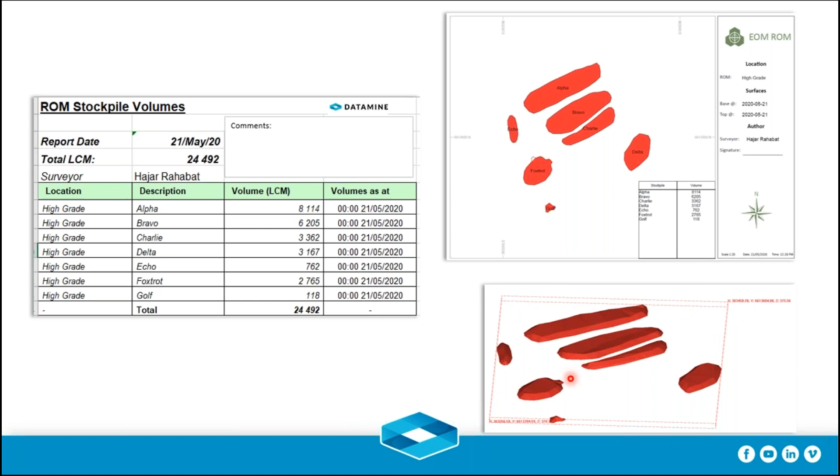The other report that we're going to do will be our blast volume calculation. You'll be able to see the PDF plot, the solid that will be generated. We'll deliberately create some complication so you can see how the blast volume calculator manages it. And then we'll also take a look at how this report goes.

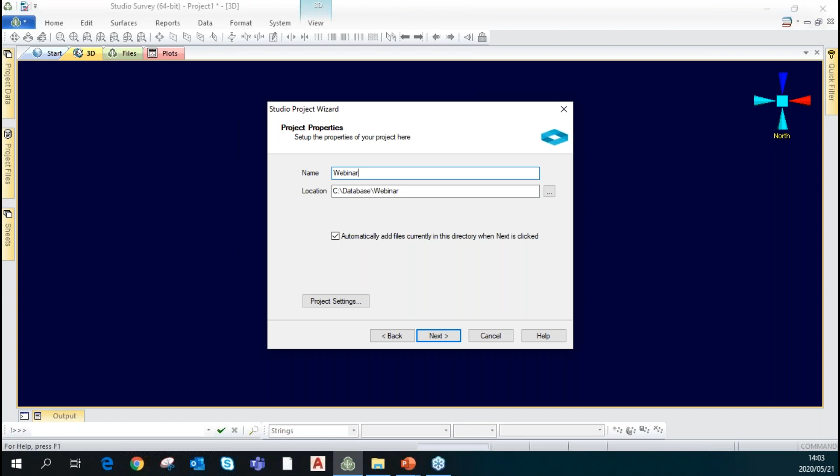So in the first webinar, we took care of how to set up a project. I'll just very quickly do that again. So we go new project, and in there, give it a name. We'll call this webinar 3. I have another webinar 3, but, oops, webinar 3. Next, finish. And we've successfully created a project called webinar 3.

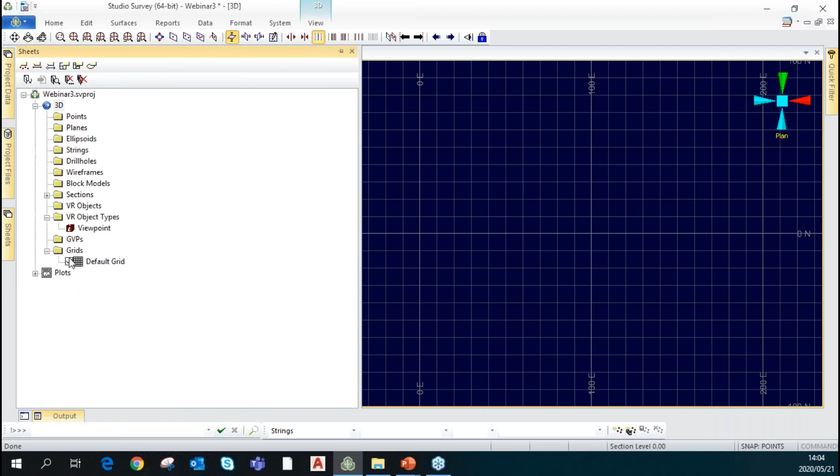So on the side, we've got the sheets, the project files, and the project data bar that shows all the files and the layers that you can switch on and switch off. For example, I can switch off the grid, and that's what you see when you switch off the grid. Okay, we can pin that or leave it unpinned. It will pop up whenever we need it.

So to make things convenient, I started off by preparing a folder that contains the various data sets that we need in the creation of our project this afternoon. So I'm going to load the survey strings for a stockpile first. In this case, I'm just going to drag and drop. Let's go to our 3D window.

As you can see, this is a messy survey. So we're going to clean it up using the string tools that are available to us, and then close these strings. And then after we close them, we're going to set them up in such a way that you'll be able to run your report.

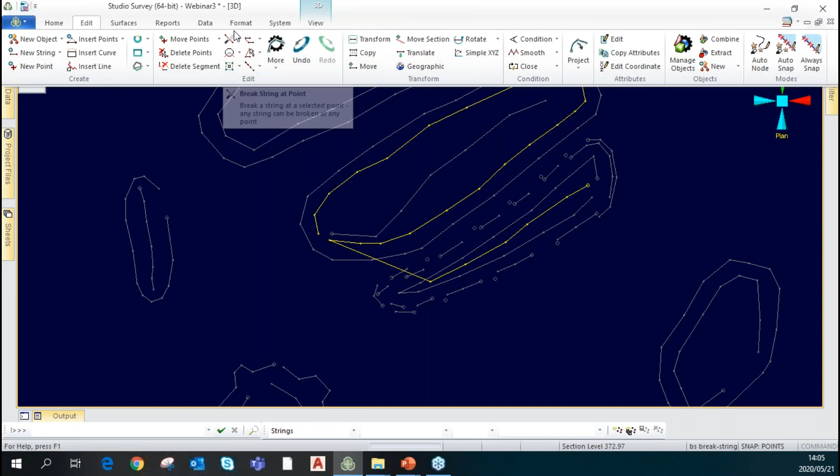So first things first, let's zoom in, let's break that specific string over there, break string. You type BS or you go to the edit tab and click the break button. So you have several different versions of how to break that. So we'll just break it. You click there and you click there. So we've broken that, we're deleting that.

So you can see as the surveyor was picking up this data set, he either moved from this dump here and then crossed over and surveyed that dump. And when he did that, he kept the code the same. So when Studio Survey imported the strings, it took that as the same data set and did not disconnect it.

The next thing we're going to do is close the strings that we need to close. So to do that, we know there's a couple of strings that shouldn't be closed, like the ones at the tops of these stockpiles. So we can hold down the control key and select the ones that we need to close, like that one, that one, that one. Okay, this is just for both of them.

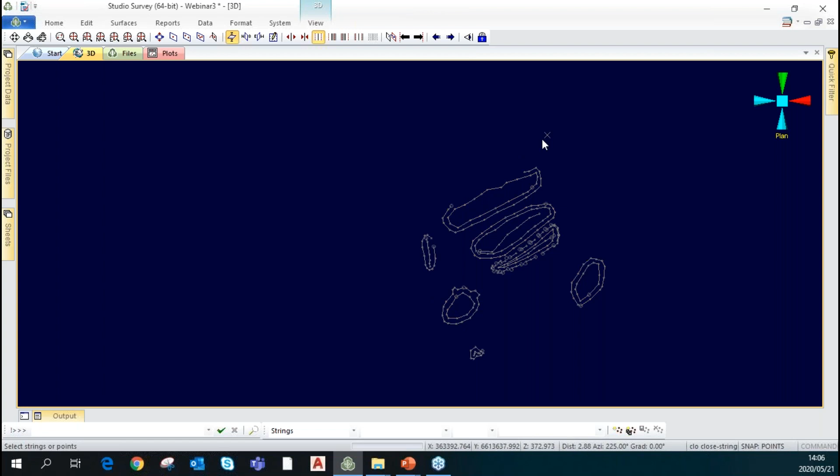And that one, and type CLO. Or you could go over to your editing tab and click close strings. I prefer to type the commands, but a lot of people would rather do it differently. So this one we can close, but you can see that this is unrealistic. This was a really shoddy survey, so we can just insert a few points based on experience.

Just move it out a bit so that we know that the boundary we're getting is where it's supposed to be.

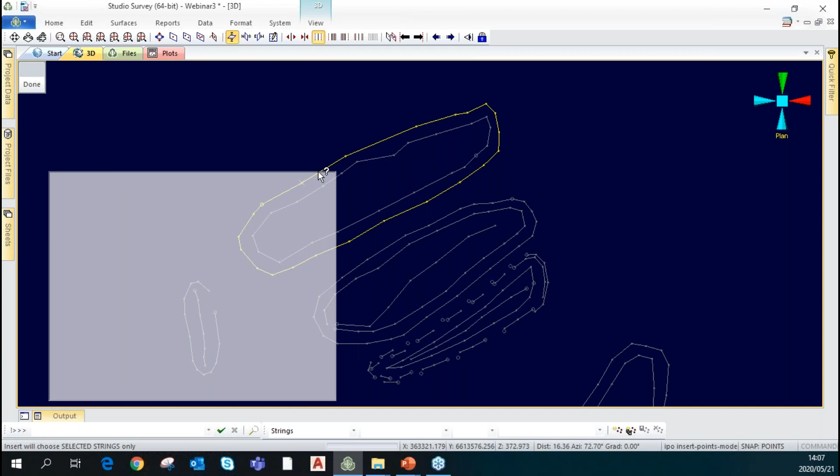Before you say anything, no, we are not supposed to do that. You're supposed to survey everything properly. Go pick up every single point around your stockpile, make sure that you've got yourself a decent data set and you're good to go. So that needs to be closed as well.

So for this one, what we're going to do is make use of the string command, which we go to edit, click new string, and we can activate the auto node, or we can click using the left mouse click, the right mouse button to connect the points that have been surveyed.

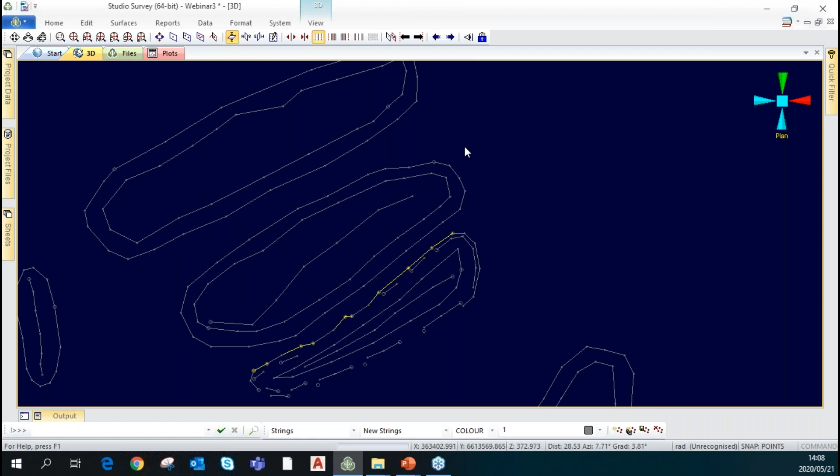So here I'm using my right mouse button to connect these two, simply because there's this data set nearby, or I can toggle with the rapid digitizer by either typing RAP and switch that on so that it digitizes, or I can simply switch on my auto node. So in this case, I'm going to use the auto node and new string and click to whatever is closest.

Now, seeing as that's not what we want, we can undo this properly. New string, snap to that point, snap to that point. So this is potentially something that you would be doing if you were cleaning up a survey done by someone that wasn't paying attention to how they downloaded the data set or did something incorrectly.

So RAP switches on my rapid digitizer, and when I click over there, same string, okay, let's go. Let's just finish that up. Close that string.

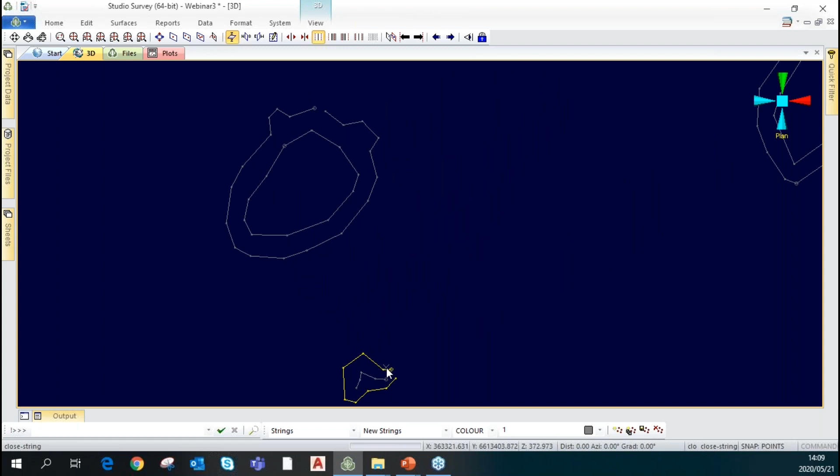So we now have ourselves a series of closed strings that define the bases of our stockpiles. I thought we closed these. Now this data set is exactly the same as the tops.

And then the other thing that you would have prior to starting off with this stockpile survey is you'd have yourself a topography on which these dumps have been created. So in this case, as you can see from the nature of the work that's been done, that wasn't created. So we're going to have to get creative, and we'll use all of these bases to build a topography.

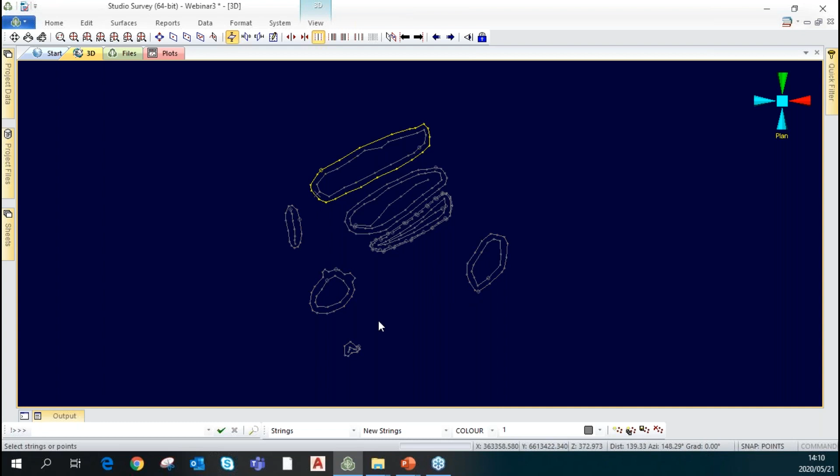So what we're going to do now is select the toes of these stockpiles, toes, toes, toes, toes. Right click and save the selected strings.

So the selected strings we have saved, we'll just chuck them into this. We'll have two uses for this file. So for now, we'll just save the base file.

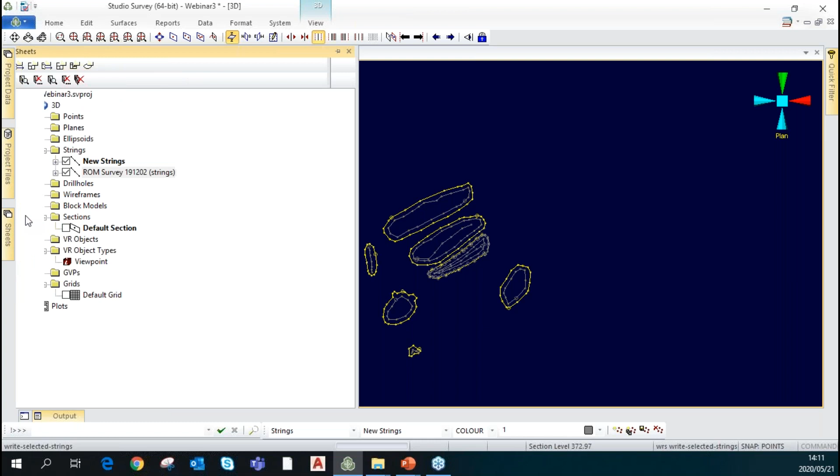And if we go to our Sheets tab, you can switch off the strings that we've got already, and then load the one that we've just created. So that's our bases file, and we're going to load that. We say OK. And what you see here is the bases that we have available.

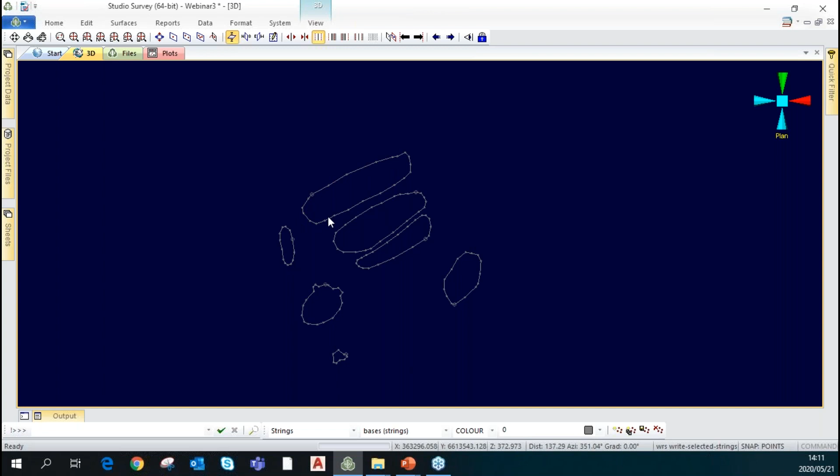Now, I did promise at the beginning of this webinar that we're going to do a rerun of adding datasets to the database. So in this case, what we have here are PIT bases. Oh, sorry, stockpile bases. But we're not ready to add them yet because the report that we have that we need to create should have a name for each individual stockpile.

But what we are going to do, though, that we are going to add to the database is the topography on which these stockpiles are sitting. And we will simply combine each of these strings to form that topography.

So we can go plan view, which is not necessary. And then when we go home, we have not yet set up a database for this. So if you missed the first webinar, you can always go back and view the video. But what we are going to do is set this up very, very quickly

By going home and clicking settings. So what you're going to have here is where you need to put a directory for your webinar, for your dataset, for your database.

So in this case, we're going to our database, and this is webinar 3 without the underscore. And then we create a subfolder in that directory, and we initialize. So once you get that notification, you know that you have successfully initialized the database in that folder. That's webinar underscore DB.

Now this here is called webinar for the sake of this exercise. You can name this after your pit, after your stockpiles, after your mine, depending on how big your project is or how many data sets you want to manage. That's entirely up to you. And then under pit, you can go ahead and push in any value you want. So the pit that we're dealing with this afternoon, we're going to call that pit Mona Lisa. It's named after the mining engineer that designed it.

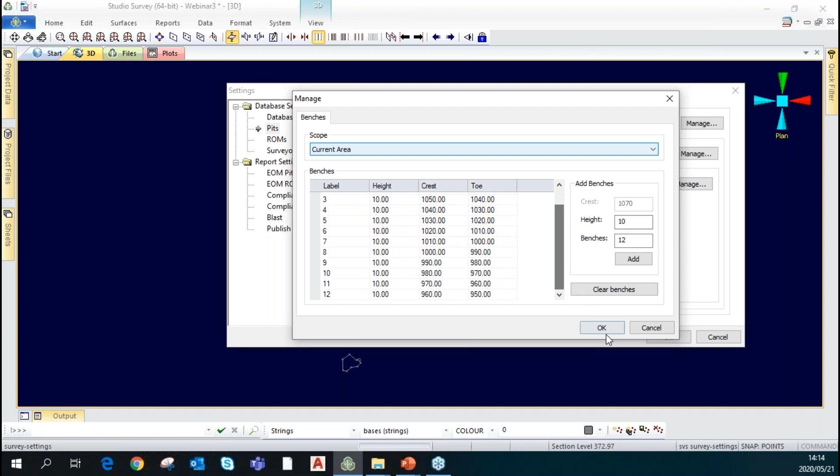Before I click OK, I think it's worth mentioning that the benches file that you're creating by doing this is exactly the same as the benches file that's created in Studio OP. So if your design team has already defined benches, you can simply drag the benches file folder from Studio OP into the location where this is being pulled from, which you can see from the earlier videos. So once we've set up our bench definitions, we can say okay.

And then under ROMs, you could have any number of run-of-mine stockpiles. So under this list, you can have your tailings dams, your low-grade stockpiles, your high-grade stockpiles, your concentrate. It's entirely up to you. So for the sake of this example, we're only going to look at one area, and that's the area that we're going to put in. So we're going to call this ore stockpiles. Ore stocks. Like I said earlier, this is entirely up to you.

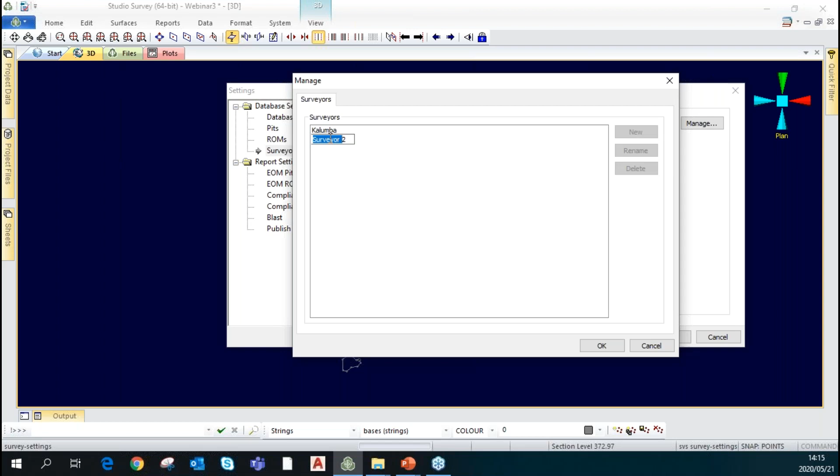And then we'll add a couple of surveyors to this. I'm going to add myself by clicking rename or double clicking the name. So I can click rename and push my name in, or I can double click and I'll have the ability to edit that. So I'll put in Her Royal Highness and say okay. So we've got 2 surveyors working on this project, and we've got them in this database setup.

So everything that we've created an area for, a pit for, a ROM for, has a folder that has been created in the database directory. So for the sake of time, I will not go back through those because we've already done that in the first webinar.

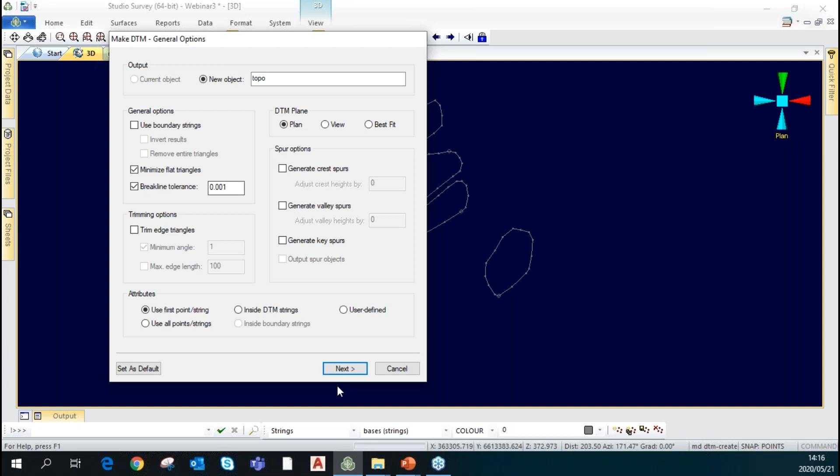So you don't need to use boundary strings. We'll definitely use boundary strings later on. We don't want boundary strings, so we say finish. Oops, sorry. What are we using? We're using the bases file to create the DTM. So we now have ourselves a base or a topo formed by the toes of the stockpiles.

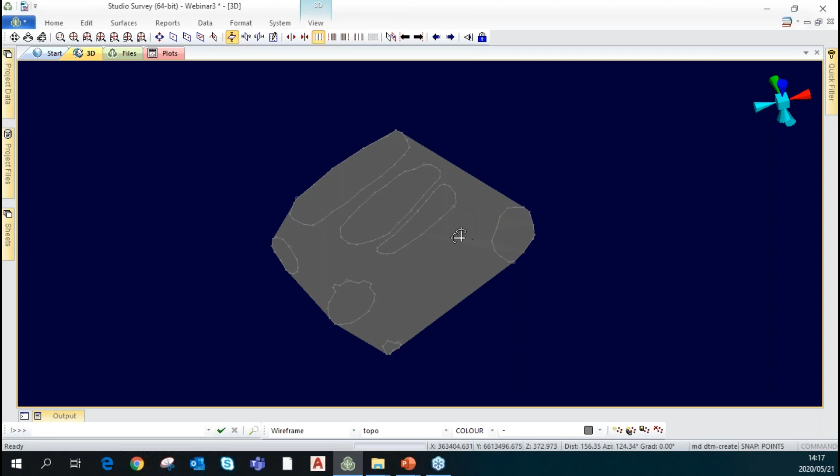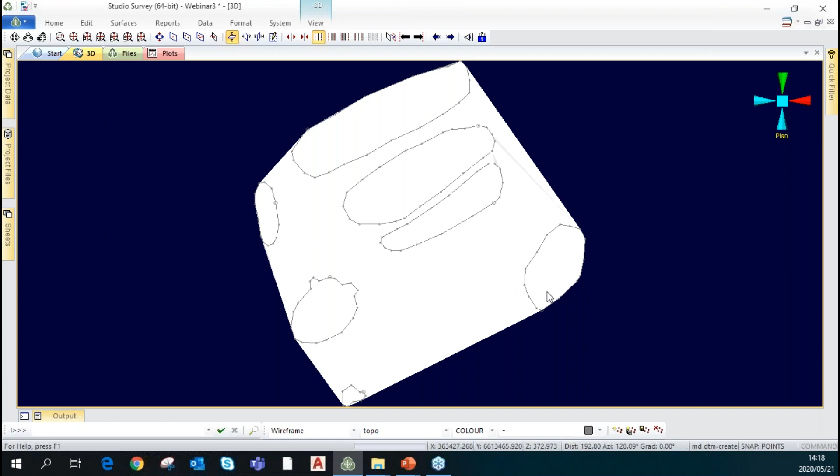So to anyone in attendance right now that's thinking this is the standard practice for surveyors, it is not. The practice is we would need to have a topo of the area before any dumping takes place. And then once that is available, that's what we load into the database. Then you're going to start dumping your stockpiles in these locations or wherever, as long as it has been surveyed before your dumping starts. So this would represent a situation where the dumping has not happened and the surveyors don't have a choice but to use the toes as the bottom. So once we've got that, we go to our home tab and click add to database.

So once we get here, we select the pit and the ROMs that this is going for. And in this case, the more important thing is the ROM for which this dataset belongs. And then the surveyor that did this; since I did this surface, I'm going to take responsibility. What type of data am I adding to the database? What I'm adding is a ROM base surface. That is where the stockpiles are sitting.

So the scope runs across either the current ROM or global. So the difference between the two: if I have a huge topo that covers the entire mine license or the entire concession area, that is what I will then say that file is. So in this case, we know that we've done it specifically for this small cluster of stockpiles. So we go ahead and say, nope, the scope of this surface only applies to the current ROM, and the source of this data set is the topo. So we add that to the database, and we're good to go.

Okay. So the next thing that we're going to create in terms of wireframes, we can switch off that topo by checking or unchecking this box. So the next thing that we're going to do is create DTMs of the individual stockpiles. So we go ROM strings, we bring those back in

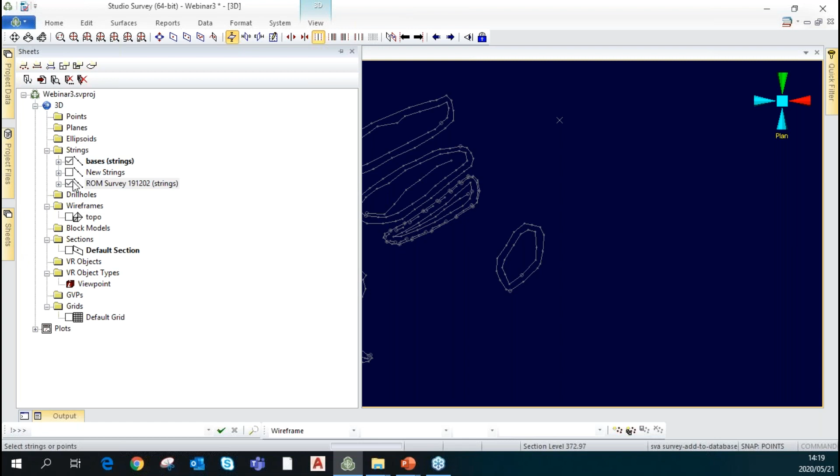and go surfaces, DTMs. Okay, so you'll forgive me, I've got 2 screens, so this is popping up on my other screen. So just in case you're wondering why that didn't happen, it did happen on the other screen.

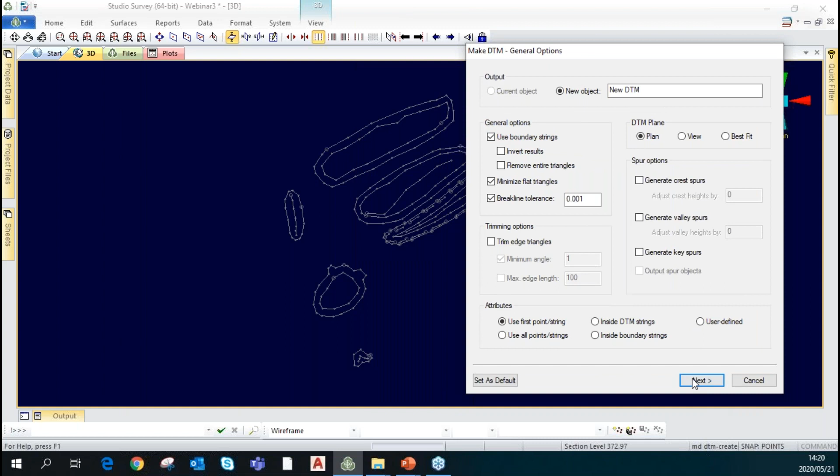So in this case, we are going to use boundary strings. So when we say next, it asks what we want to use to create our digital terrain model. So we want to use that dataset to create our DTM, and you can also use the bases. It's the same dataset, it just makes it more consistent. So we go next, then you select the boundary strings that you're going to use to create each of these heaps. So we select our bases file.

So if you remember, our bases file consists of these bases over here. So that's what we're going to use as our boundary strings. So when we click finish, the DTM that's created is constrained to those boundaries that we had. So we know that this new DTM is called new DTM. So we're just going to go ahead and add this to the database as well.

So in this case, we're going to say Hajar did this because it's a nice clean data set and she's very, very careful. What kind of data are we loading to the database? What we are loading are the actual stockpile surfaces. I know I've skipped boundaries because there's one more thing that we need to do to them before we can actually add them to the database. So we're going to go ahead and add the stockpile surfaces.

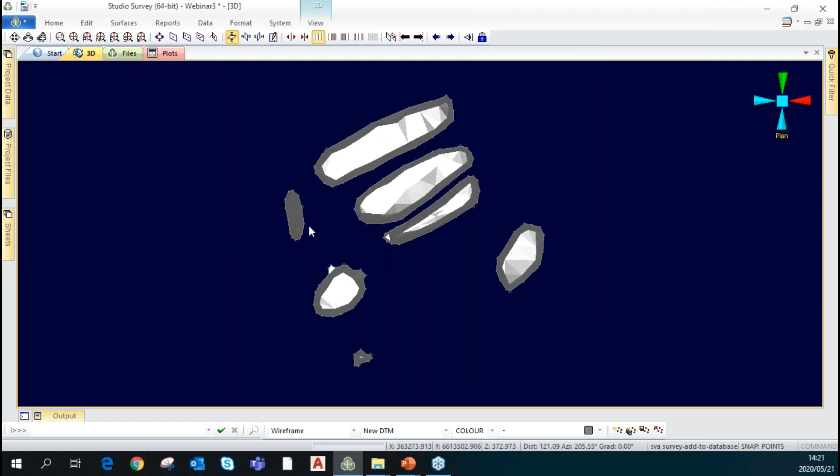Scope, the meaning remains the same. The data source is the new DTM. Very important. So we add that to the database. Task completed successfully. And finally, we now need to deal with our stockpile boundaries.

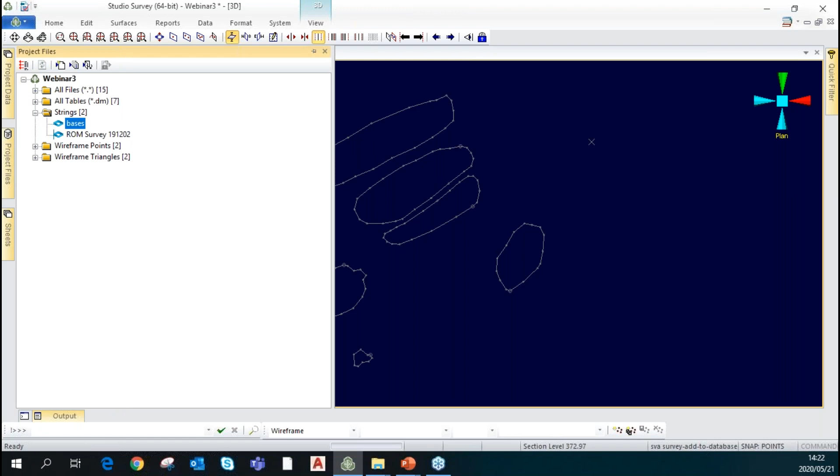Now, the one thing that we need to do for these stockpile boundaries is actually assign the names of the individual stockpiles. So we can come back here to the data tab and then add a column. So what I mean by adding a column, let's just go to the project files first. Let's open the strings, and it's open on my other screen again.

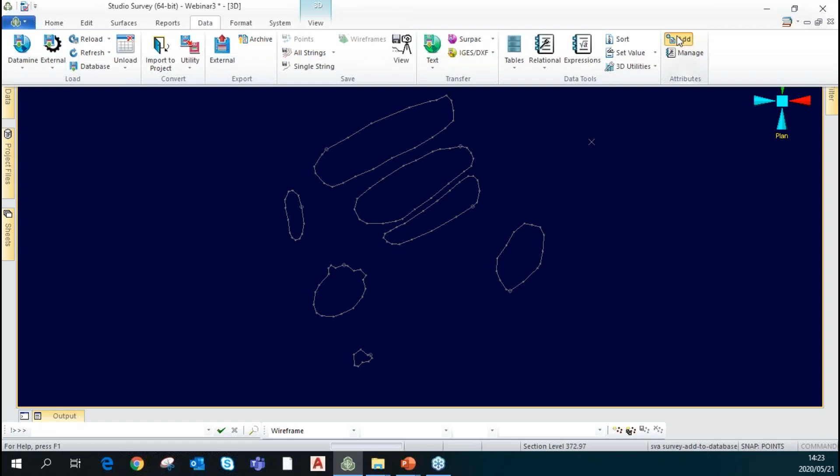This is entirely up to you in terms of how you configure. But what we're going to do now is add a column to this data set. So to do that, we go data and add a column. We'll type STK name. The type of name is going to be alphanumeric because, well, this actually depends on you, the user.

First of all, if your stockpiles are numbered 1, 2, 3, 4, 5, you can leave it as numeric, that's fine. But if you've got Bravo 1, Charlie 2, you can then put it as alphanumeric. And then the default value, you can leave it absent. And then you say, okay.

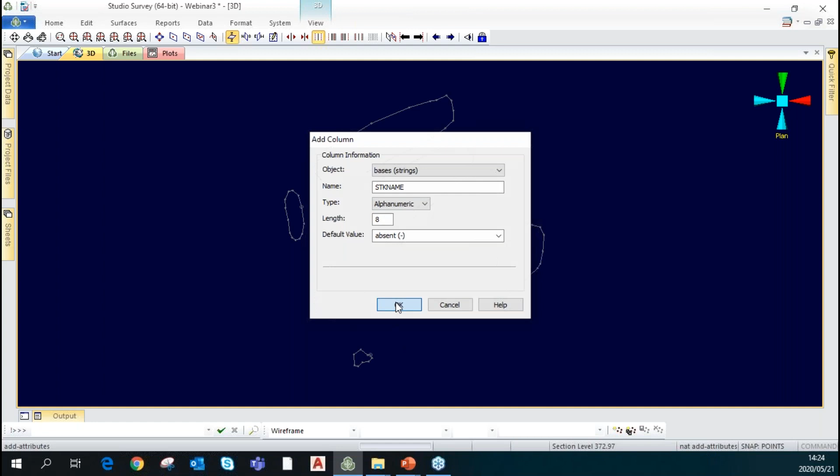So if I bring up that tab again where we open the project file and open the bases file, at the very end, oops, one thing we forgot to do was actually save this file the moment we did this. So we go to bases, right click and click save.

So now that we've saved it, when we open that file, you're going to see that column that we added to this data set come in. So what this does is it gives us the opportunity to add a stockpile name to each and every one of these strings. So in order to do that, you go to your edit tab and you edit the attributes, because each column is represented as an attribute.

So we go to stock name, we select the string that we're dealing with, stock name, and we can call that anything we want. So we're just going to go alpha, apply, select the next one, which will be blank, stock name over there, beta, apply, go over to the next one, select, stock name, Charlie, we apply, we go over to the next one, and so on.

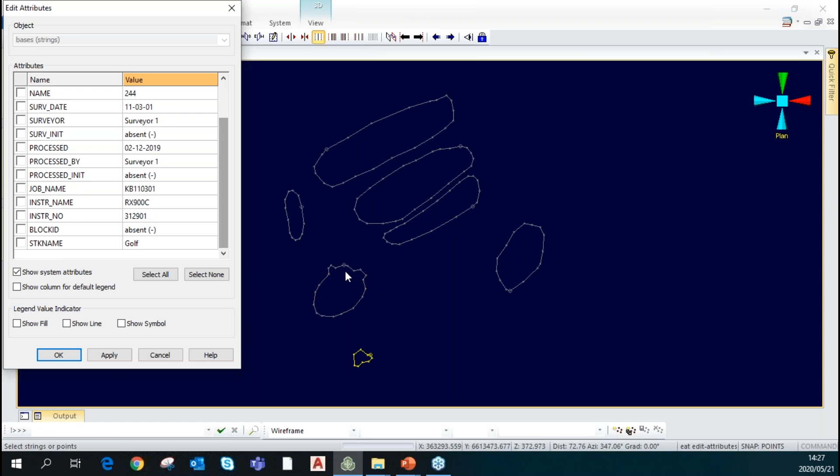The only reason we're checking this is because sometimes you may have skipped over to the next string like I did for the first one, and I'd forgotten to click apply. So it's very, very important that you ensure that you check what you're doing. So now that all of these stockpile names have been written to the strings, you can then say okay, and that closes that window over there. And then you're ready to add that to the database.

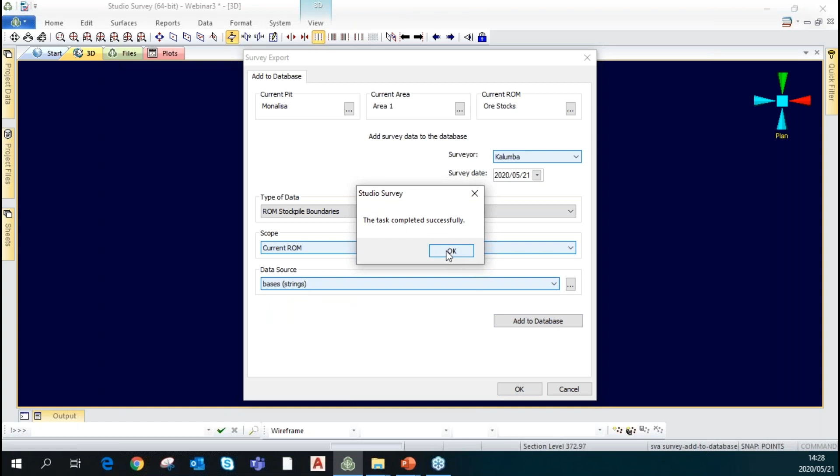So we go Home, Add to Database. What are we adding? We are adding the stockpile boundaries. So Studio Survey is immediately going to look for the strings, and we know that the string that we want to add as the stockpile boundaries is the bases one. And we go ahead and add that to the database. And we're good.

So it might so happen that your mine does not change the location of these respective stockpiles. So this tedious process that we've just gone through of naming each individual one, you're just going to do that once. If maybe the first stockpile is a high grade one, that one's a low grade one, and they dump consistently on those, maybe the only thing that you're going to do is edit the shape of the boundary, and you've got many, many tools. So maybe you want to change that by inserting a line or something. Oops, I forgot that that one was selected.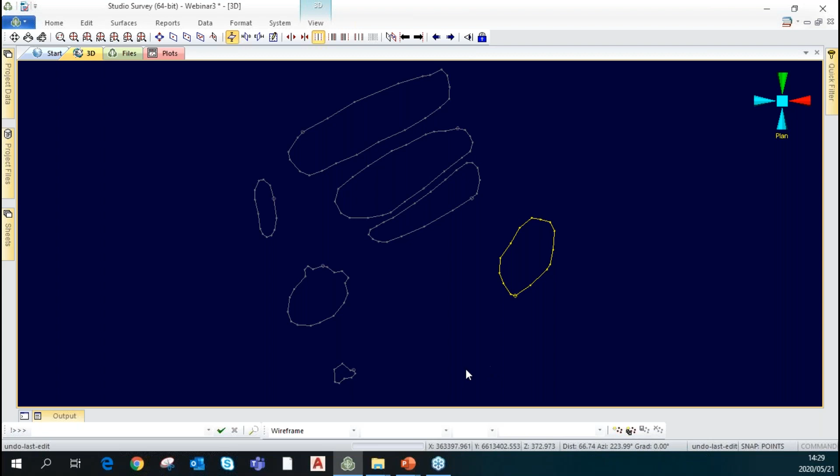So if you've got, say, that one and you want to change the shape of that, say you've got a bit more material, you can insert a line and you can change the shape, or you can move a point by typing MPO and move that to take care of any material that has been added. So that will work as your boundary. So let's just undo that. So at this point, you're ready to run your calculation.

So we just go to Reports, we go to ROM, and these are the only data sets that we've added. So if you had a ROM stockpile surface that you had inserted earlier, that would appear on this dropdown. And if you're like me, you're a bit paranoid and you want to make sure, hey, what surface was done on the 21st of May? You can take a look, it's opening on my other screen, by using your googly eye, and that will open up. And then you say, yes, that's the one that I'm looking at.

And then your base surface, okay, am I sure that this is the one? You can go ahead with your googly eye. This one has been a bit more merciful. It's opened on the correct screen. So that's the correct surface.

Can you adjust it a little bit? Because we see it's too big. Oh yeah, I can, sure thing.

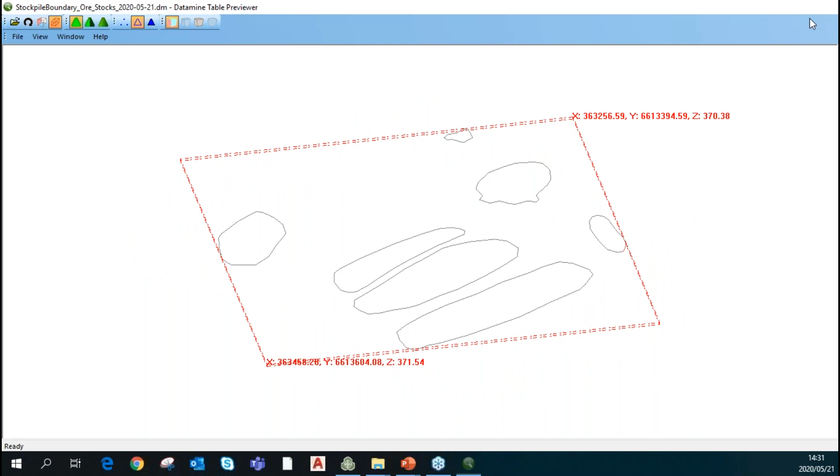Okay, so there we go. So this is your quick visual check on which data set you're loading into your calculation, and that will be your stockpile boundary. So in this case, we're happy that this is the very same data set that we want to work with. So we just go ahead and click calculate.

So like we did in the other examples, if you've got a lot more areas to work with, you can simply add this to the batch process and leave it, and then go ahead and set your other area up and add that to the batch process. And when you run your batch process, it will then run all of those calculations while you're doing something else. So we click calculate.

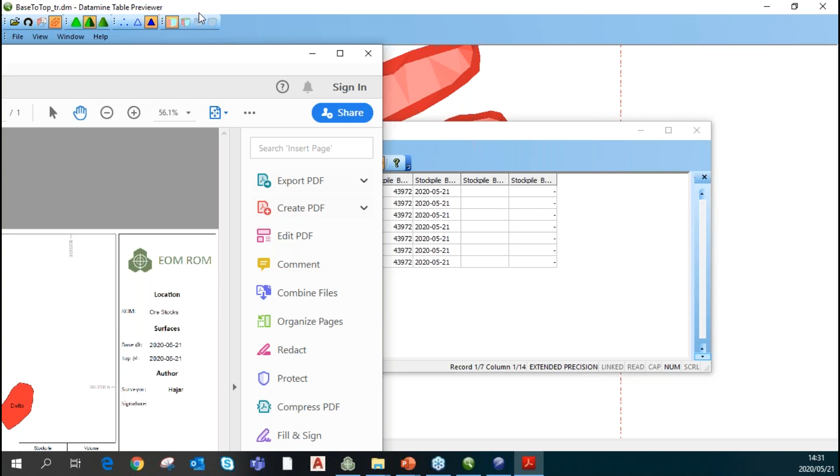And our task is successful. So with our googly eye, we can take a quick gander at our results. So in this case, the PDF has opened up on my other screen. So that's the PDF that we've created at 14:31 on this date. As you can see, it's still the exact same time on my monitor right now. So this is the report that we have created with the respective stockpile names that are assigned.

And then we've got the alpha pit with that volume, the beta pit with that volume, the Charlie pit with that volume, and so on and so forth.

So Hajar, since you did this job, you have to sign off for this and submit it for approval.

Yes, sir. The other thing that we do get is this table that is the raw data, which is where that PDF drew its info from. So that relates all of these data sets with respect to the string that it's written on, and the boundary strings, and so on. So all of this information is available to you, and you can see it's got a crazy number of decimal places, which every single surveyor knows, even to 0.1 in terms of volume is okay.

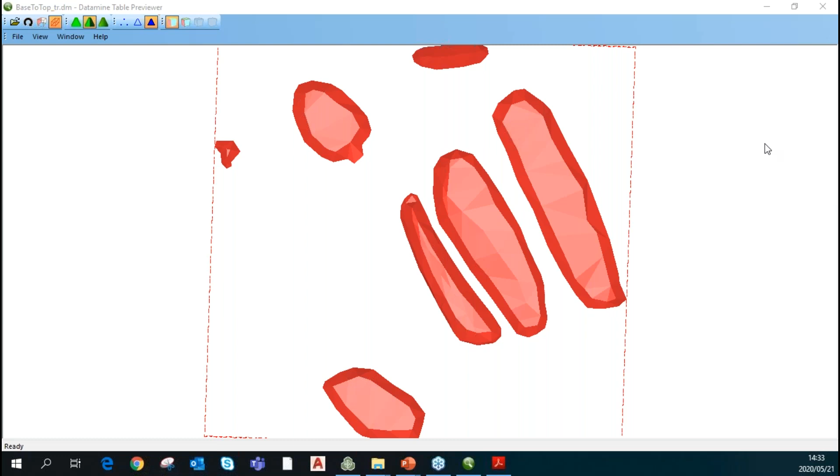So the next thing that you can do at this point is go ahead and just publish your report. So when you click publish, we're not doing the end of month, we're doing the ROM, we're not doing a compliance to plan or compliance to design, and we're not yet doing a blast volume calculation. So in this case, there's only one report. So if you had a series of stockpile reports below this, Studio Survey will save you the hassle of selecting the most recent date and just give you what's most recent.

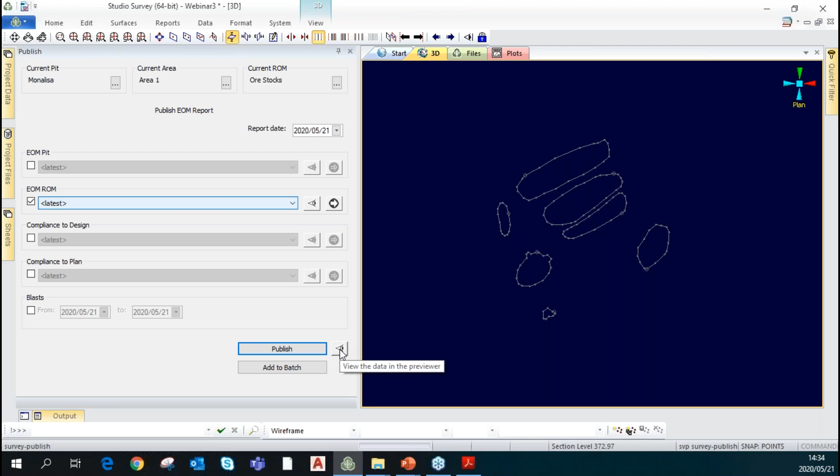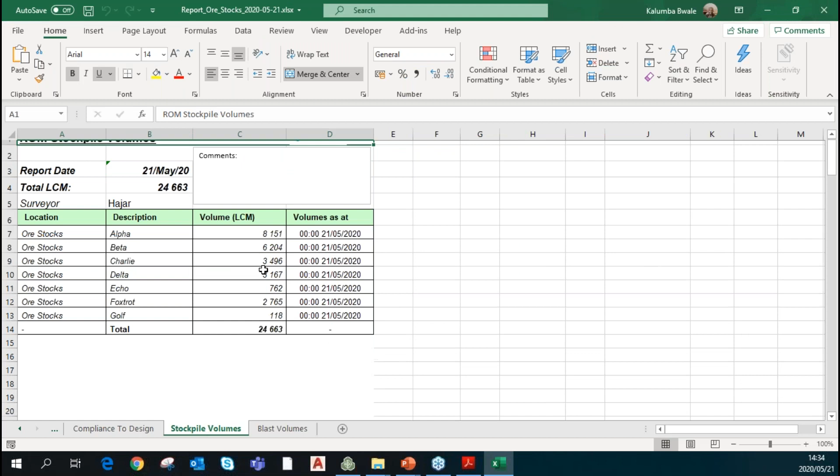So you go ahead and click publish. You can take a look at it if you want. We've already done that. Publish. So task is completed successfully. So once you've done your publication, your googly eye, and again, the Excel spreadsheet has opened on my other screen. So there you go. Your stockpile volumes, that is the report that you will be seeing every single time you run the stockpiles in that manner. So in as far as the volume calculations for stockpiles is concerned, this is the process.

Okay, so if you have questions, please just type them into your question site. I've seen that someone's commenting about a lag. Hajar, do you have the same lag where what I'm pointing at? No? Okay, cool, it has been resolved. All right, excellent. So there we go.

That is how you generate a stockpile report without having to copy a volume from individual solids and pasting it. Also, as you saw, we've got the plots already done for you, so you don't really need to go back and start doing this and pasting numbers, the inconvenient stuff that we generally don't like. So all of that is taken care of for you by Studio Survey.

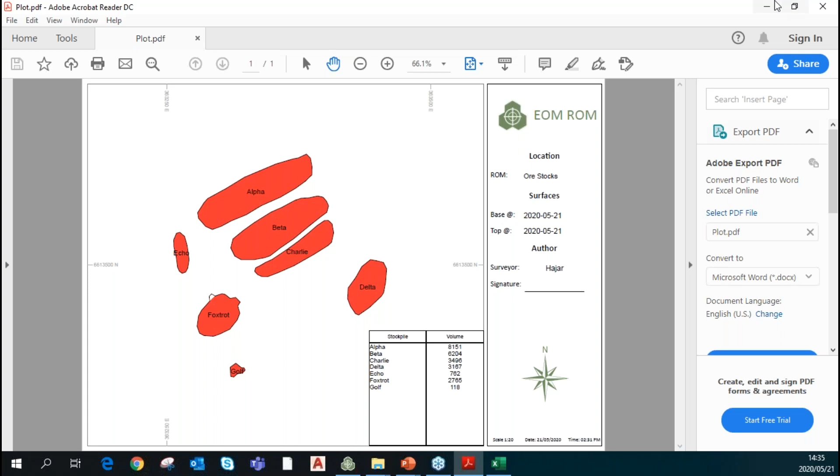So we're moving on to the blast volume calculator. Let me just close this up, close the report, and close that. And I'm going to unload my data set, unload data. We can unload everything at this point. Select all and unload.

So with regards to the blast volume calculator, as a surveyor, you're going to go out in the field and do a pickup.

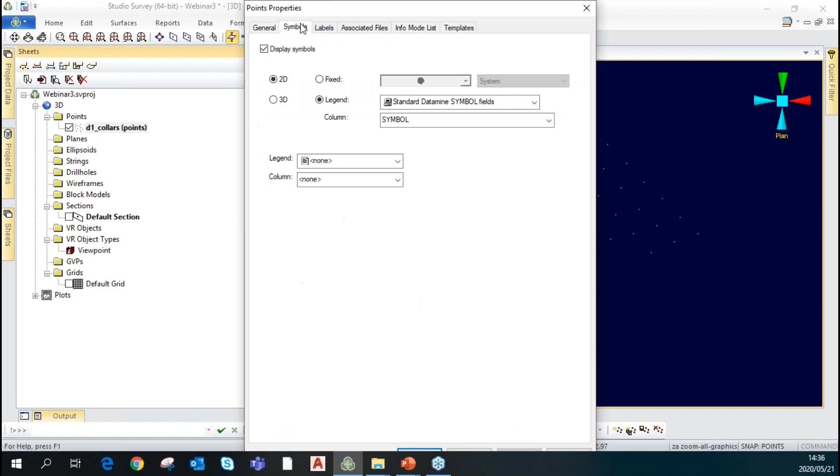Ooh, that's horrible to look at. Let me just change the attribute so that's a bit more visible. We have loaded some collar points, so let's change the symbols to something more visible. Fixed, and where's our color? We can change the color to something you can see easily against that backdrop. Let's have them bright. No, let's have them red.

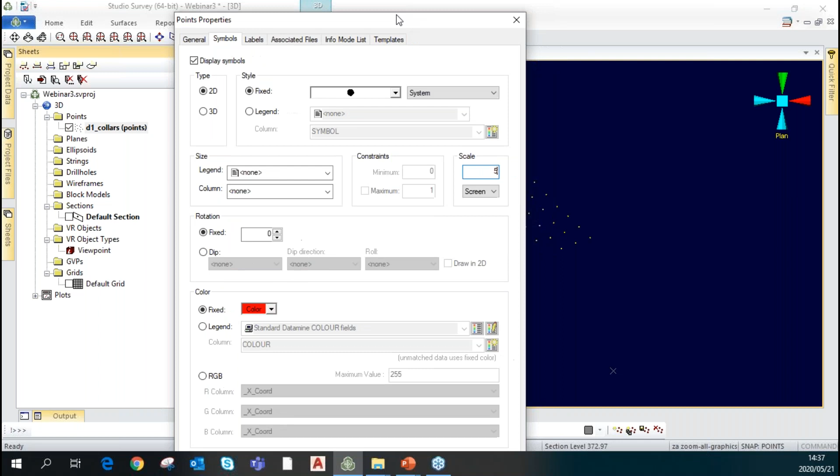There's an apply button I couldn't see on this screen. Oh snap, the size is a bit too small, so let's go back again. Hajar, can you see them clearly? Yes, but if you can make them a little bit bigger that would be fine. So to make them a bit bigger, we go ahead and change the scale to 5 and click apply. Once again, the apply button isn't accessible to me, so apply and OK. That's great, so there we go.

The other data set that we will need for this is the pit design.

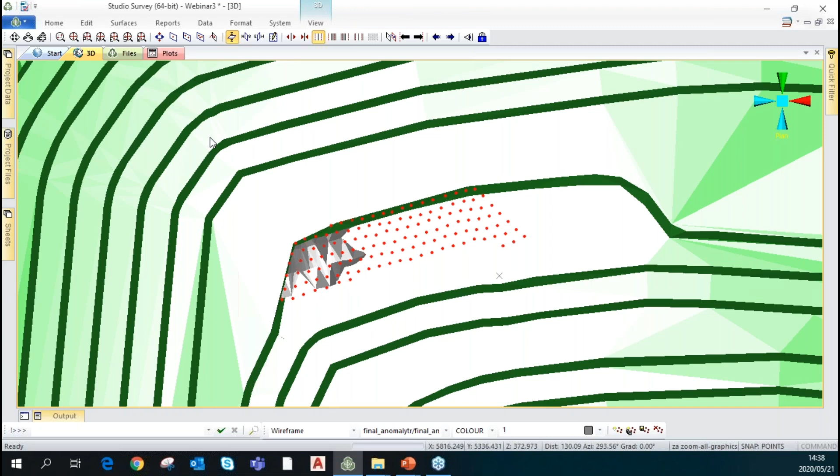And just to make things interesting, we're going to chuck in... as an engineer, you probably want to drill to the top of that surface over there. Let me just zoom out. Let's give ourselves some logical reason as to why you would only want to drill to the top of that thing and blast only that material, but we're doing this for the sake of this example.

So in case you're wondering why your collars are suspended, that's because they were surveyed on this topography over here. So let me just make this a bit transparent by double clicking it and saying OK. Yeah good, I couldn't see the OK button over there, so we're good now.

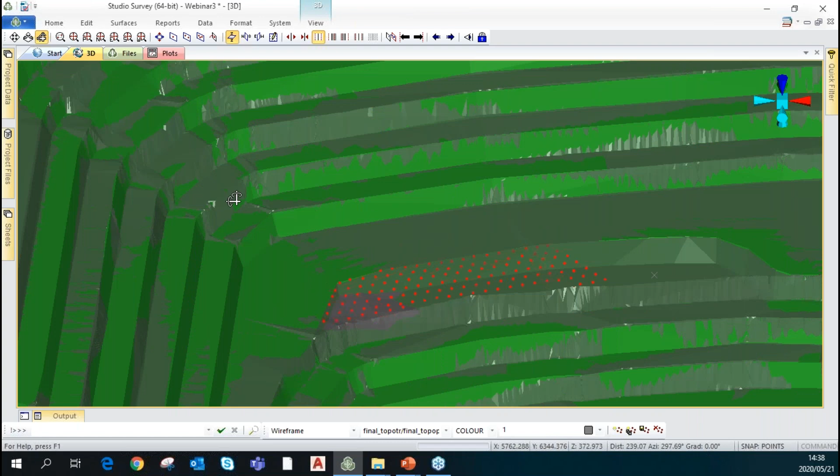So you can see that we've got this very hard-working surveyor. In this case, I'm going to claim that she went ahead and surveyed the hole collars for this bench. And then we want to have an estimate of the volume of yield that we're going to get from that specific area.

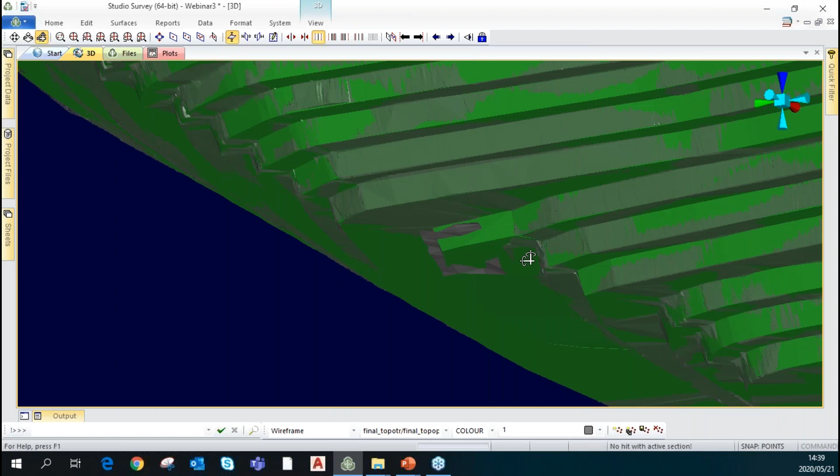But the engineer subtracted, indicated from the drill pattern, that this should only be drilled to that surface, so the drill depth was probably adjusted to suit. So let's unload the topo so we're able to see things a bit more clearly.

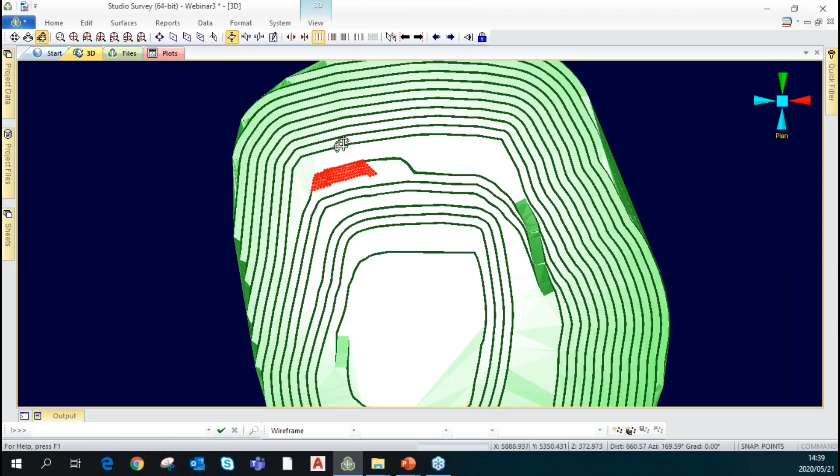So we've got that as the pit design, and then we've got our hole collars, and then we've got that thing. For some of you dealing with coal mines, this might be your coal seam that you're mining. Generally speaking, as far as coal mining is concerned, you don't really want to drill into the coal seam from waste. So you want to just stop short of where that coal begins. This would be an example of how this blast volume is going to be dealt with.

So let's just switch off these two DTMs so that what we're looking at is our collars. And since these are already sorted, we can go ahead and say add to database. We want to add a designed pit surface, and it's going to affect our current pit, same area. This was done by Hajar, she's the mine design engineer, and we add that. Task completed successfully.

We can add this as a pit blast bottom. So what this means is we're only going to blast to the surface of that pit, and this applies only to the current pit. Reference name, we'll call this BL at 1040. We can add that to the database, and we're cool. So those are two data sets that we need.

And just for the sake of it, we can also add the surveyed pit surfaces for those that missed last week's session. We can add the topo as well to our database, and that was surveyed by Hajar. She probably went in with a GPS and picked up the entire pit over a weekend and came back.

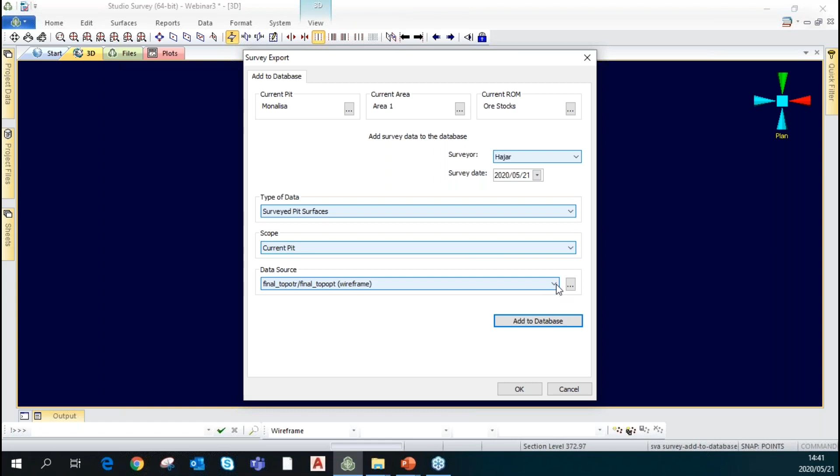So there we go. Coming back to the calculation of our blast volumes, what we're going to do first of all is define a perimeter. To do that, we go to our edit tab, and in this case I'm going to switch on the auto node, and then new polygon, and new string, that's entirely up to you.

And you can see how much of a breeze it is to digitize around points in Studio Survey. This is just one of the things I enjoy doing. It's going to be tedious doing this any other way. So we have ourselves an outline.

So once we've got this set up, we then go back to our reports and click blast. Before I continue, I must mention that the blast volume calculator is going to be different from these typical reports that you run at the end of your reporting period. So if you're reporting at the end of the month or at the end of a quarter, you're going to have these reports generated in that session.

Whereas for this, it can be more your day-to-day, or every second or every third day whenever you pick up the hole collars in your pit. So in this case, we've picked up the hole collars that define a perimeter.

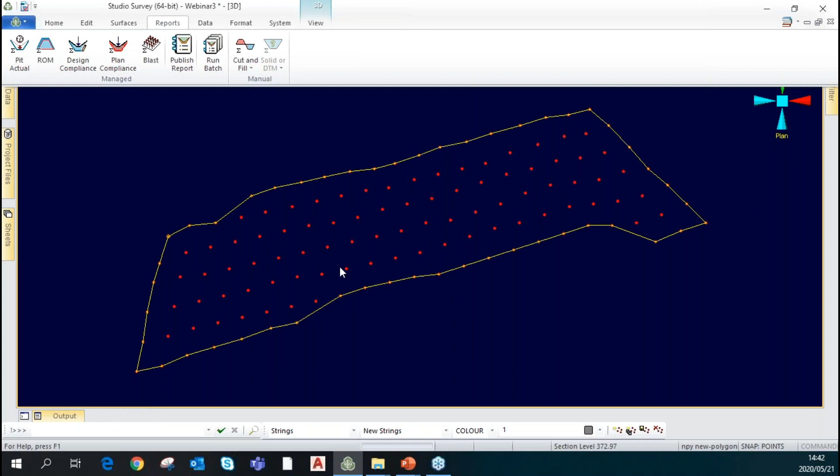Now, I'll admit, if this doesn't look like what you're used to, it's because it was drawn by me, and I am not a professional mining engineer. I am a surveyor. So Hajar, I'm going to blame you for this blast design if it looks in any way unrealistic. Okay, so here we go.

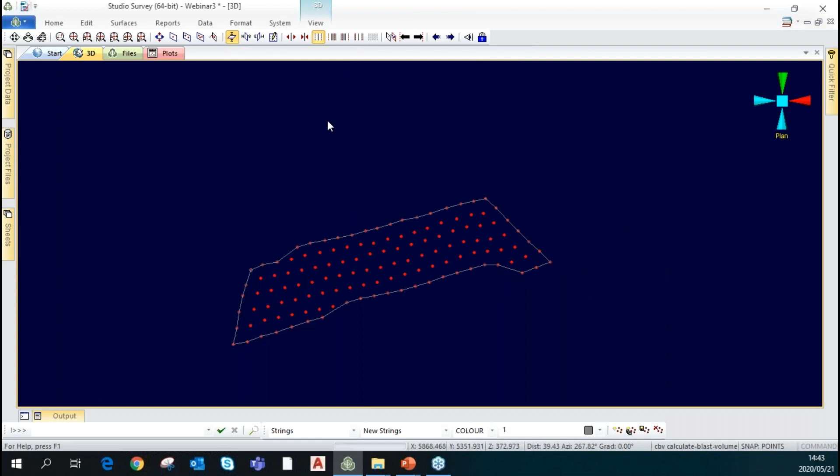So we go to our reports and click blast. We get that dialog box. The other way to do this is to type CBV.

So as a surveyor, you would go ahead, and once they've drilled out whatever blast design was drawn, you're going to go pick up each individual hole and then define a perimeter like we did just now. And in this case, we know, depending on how you define your blast IDs, so for this one...

We're drilling from the 1050 bench going to 1040. And since it's my pit, I'm going to say I'm going to drill this from 1050, and that will be my naming convention from now onwards. We shall always name these blasts from the top. And if you disagree with me and say, no, we always name them by the toe, then you'd name it 1040. But different mines have different conventions, and it's entirely up to you how you go about that. So I'll name it 1050 and continue.

So the first thing that we're going to do here is define our blast outline. In this case, we've got this new string here, and we select the string that we're going to use as a basis for defining our blast outline. We're going to use this same perimeter of the blast holes that we picked up and say get outline.

So the moment we get outline, Studio Survey immediately creates for you another object in the file, which is called the blast boundary. So what that does is it leaves your original string intact.

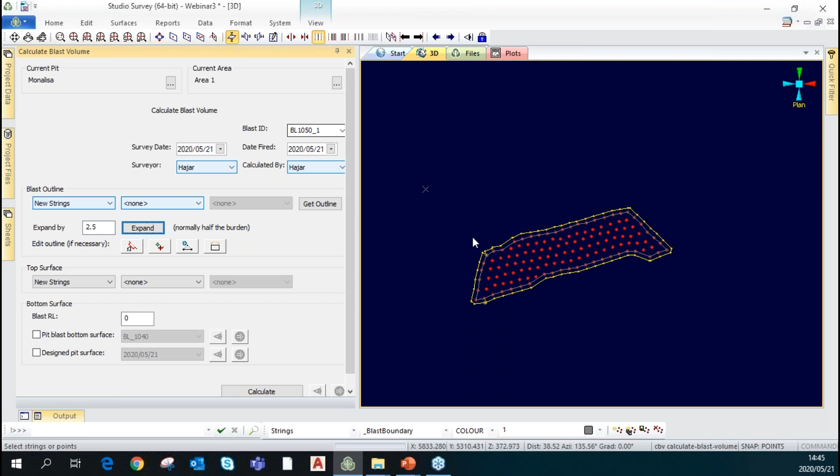And makes it so that when you run your adjustments, say in this case, we're going to expand. We're expanding by 2.5 because we know that our blast burden is 5 meters. So that goes all the way that side.

Ooh, something funny happened there. So we can just delete that point, DPO, fixed, and we're good to go.

So we have a blast outline as defined by the extent which we expect the hole to have influence.

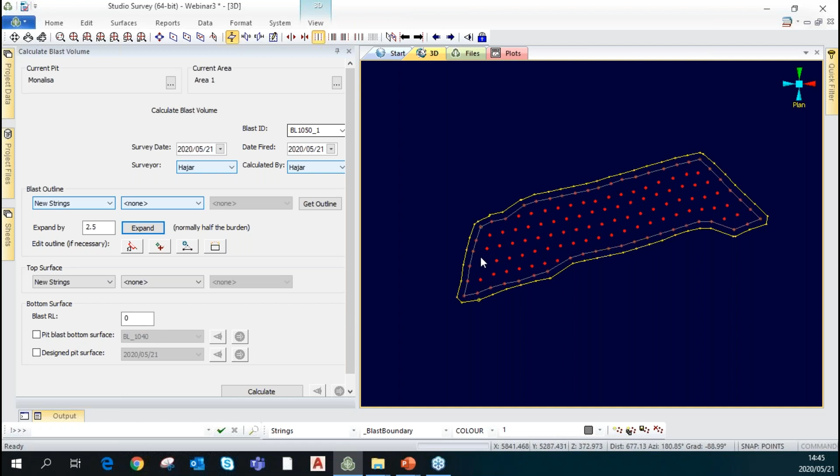So very quickly, I'm going to load back our anomaly that we've got and the pit design as well. The reason for this is I want you to see the various data sets that the blast volume calculator is going to honor.

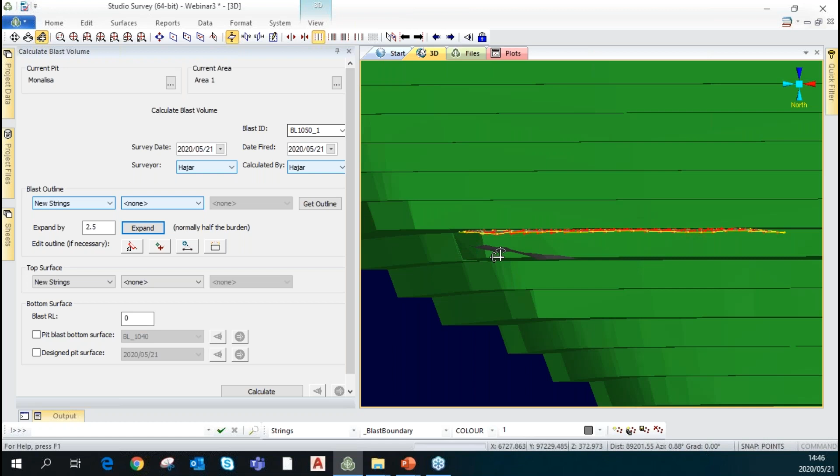So we've got this anomaly that was identified, or the seam, the top of the coal seam that you don't want to drill beyond, or maybe it's a pocket of emeralds, and that's just what you want to expose at that specific point, and you want to blast here and then go down. So you definitely make such adjustments for that specific bench, and then you can also make an estimate on what the trend is from that point onwards.

So at that point, we've gone ahead and defined our blast outline, and we need to get our top surface. In this case, our top surface, we'll use the collar points. Since the surveyor went out into the sun and picked these XYZ, XYZ, XYZ, it's bound to give us an accurate representation of the topography of that area.

So once that's taken care of in terms of our top surface, we then choose the various parameters. We're going to do this calculation twice. First, with the blast RL being 1040, which is...

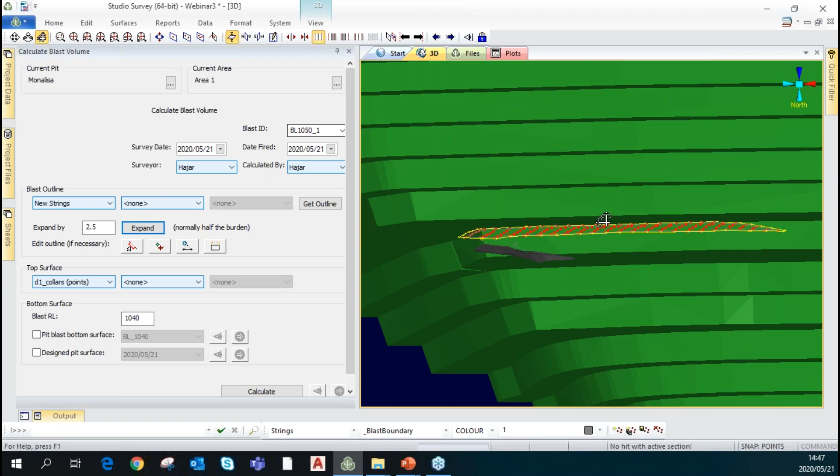Where we're blasting to, so this bench over here has an elevation of 1040. And then we're going to also say, you know what, recognize this anomaly. So the anomaly that we're recognizing is that one. We want the blast to be calculated up to that point.

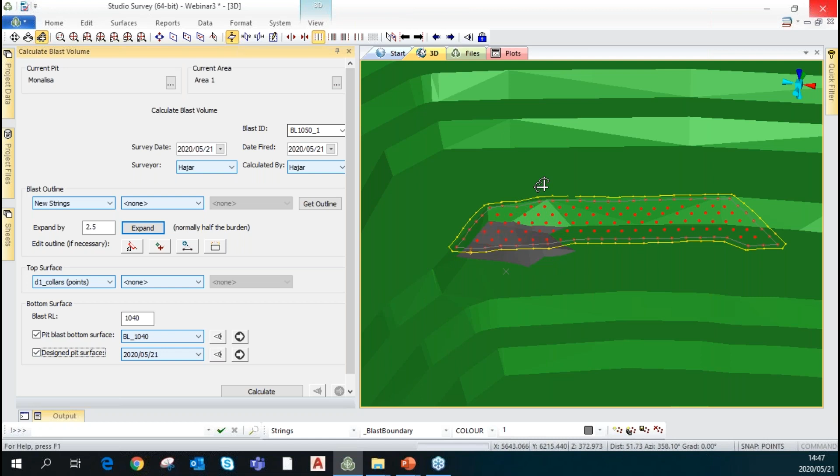And because the drill design was issued to that effect, we load that in as well. Also, we want to make sure that we are honoring the pit design. So all of these holes in the perimeter at the back would have been probably drilled to very short lengths or inclined and so on, but in such a manner that they honor the pit design. And we go calculate.

Our task is completed. So what we have now is that blast volume that has been calculated. Let's just zoom out a bit, pack that away, and hide this.

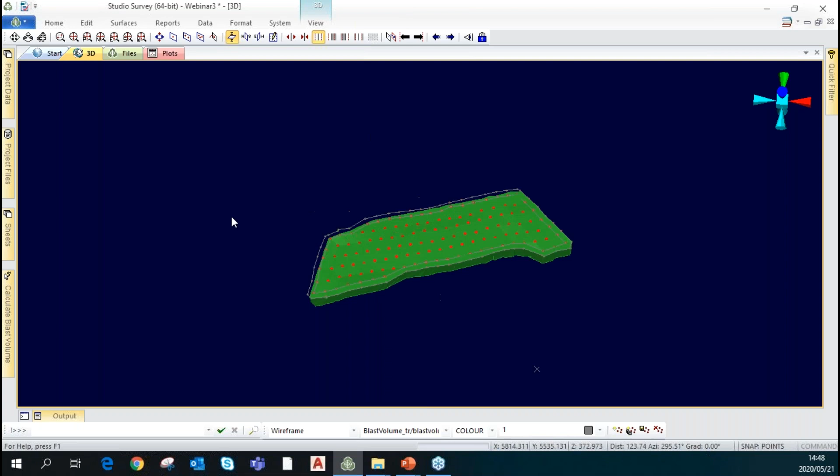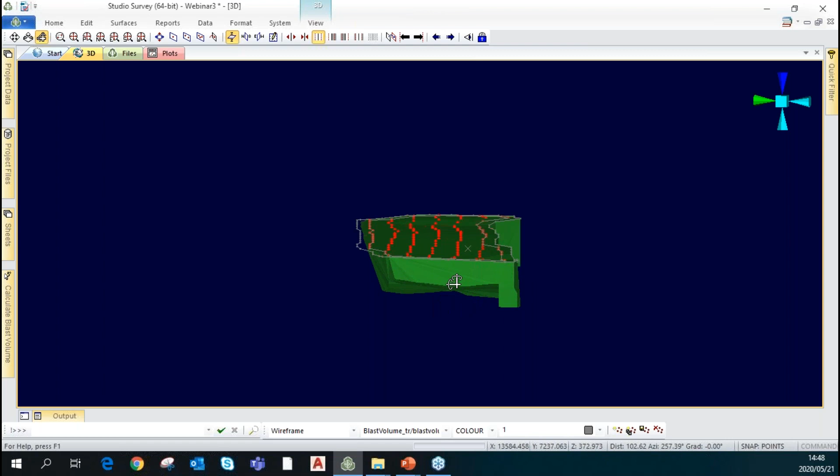As we examine our blast volume, you're going to see it honored the extent of the pit design, and our calculation also honored that anomaly that was in there. All of the holes that were drilled and indicated to only go that far were honored in the calculation. I don't have a very good name for it, sorry, I should have spent some creative time thinking about what to call it.

So all of those reasons could exist. We have definitely gone ahead and done a calculation for your blast volume. Let's bring up the calculator back. What you have here is a situation where that blast bottom is being honored. So if you choose not to...

Let's change that. Let's call that blast number 2 and calculate. Done successfully, and we can load that data set in by clicking the arrow. You'll see that it has now disregarded that anomaly that was there, simply because we said we do not need to use that anomaly in our computation. So you can constrain this also by elevation or by pit.

Let's say we want to calculate this up to a height of 1045 and within the constraints of the pit design. When you calculate that, oops, sorry, my bad, we haven't changed the blast ID. So we change our blast ID to blast number 3.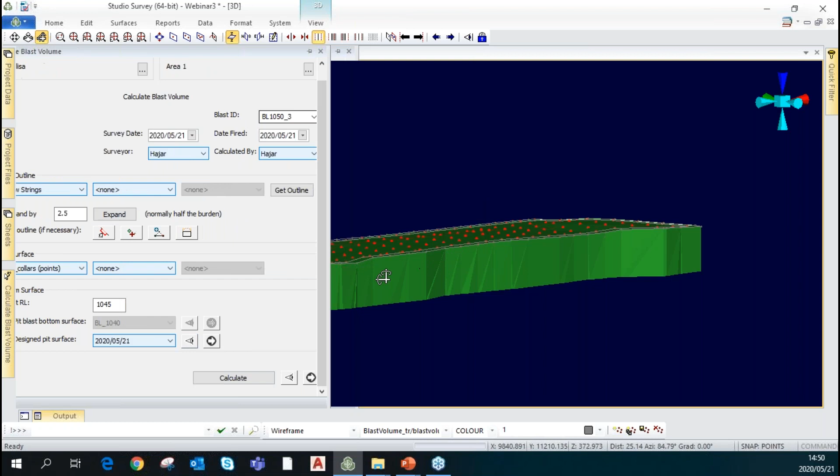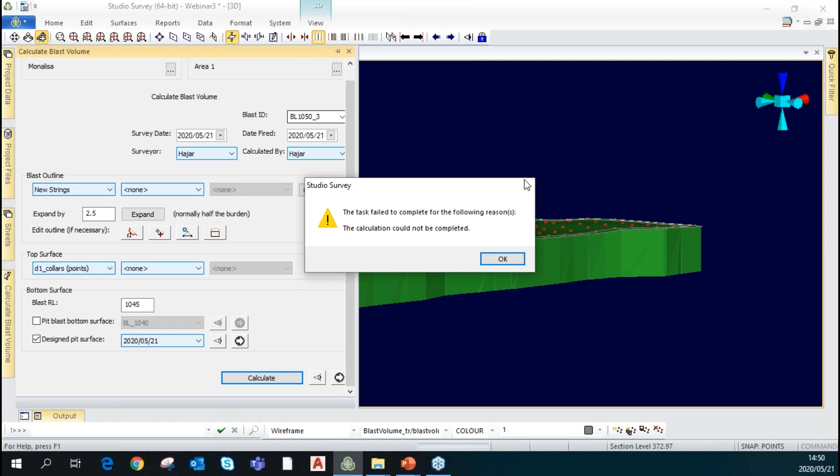So what we're going to have here is 3 different blasts that we're going to compare against. Perhaps you're making an assessment to say maybe it might be easier for us to blast this in flitches. So we have... oh, I didn't load that blast volume, eh? So, 1045, calculate, yes that's there, blast 3, nope, and then we load it. Okay, we're good to go.

So we come back to our sheets and we have the third wireframe, which you can see has been constrained by the elevation that we changed here to 1045 from the original 1050. That will be another quick way of performing that blast calculation. So there you go, that is the Studio Survey blast volume calculator with the 3 types of outputs that you can get out of it.

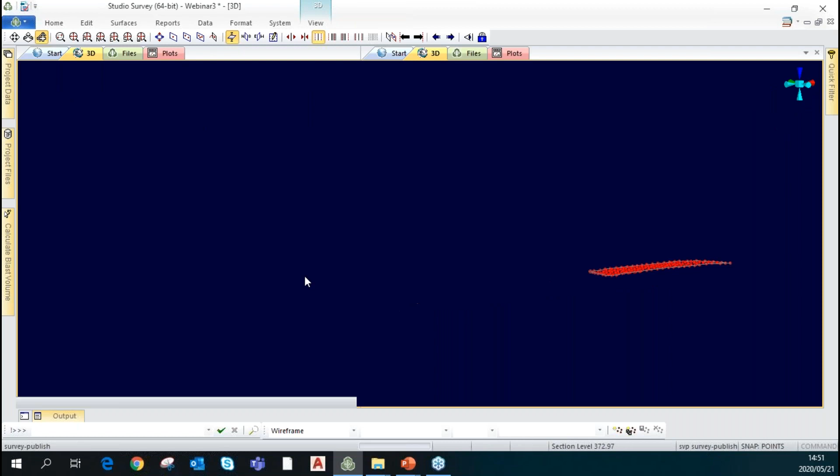So the next thing you're going to do, now that you've got your blast volumes calculated, you can go back to your reports and publish. So today we've done our stockpiles and we've done our blasts, but just for today. And we go ahead and publish, publish, publish.

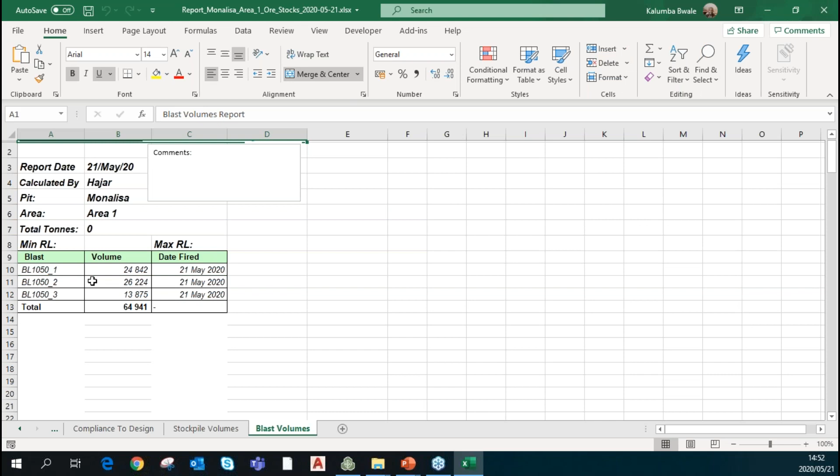Once you've done your publication, you can go ahead and view your results by clicking the oogly eye, I don't know what it's actually called. So you have yourselves the individual blast volumes. I'll find out, don't worry, I'll find out. So you've got your first blast volume, which took stock of that anomaly, you've got your second one, and third one.

Now, obviously, these blast volumes will be for different areas. If you're looking at it in practical terms, you might have a blast volume for what we're looking at now, which we've done 3 times, or you can have another area here and so on. And Studio Survey will keep a database of these volumes for you.

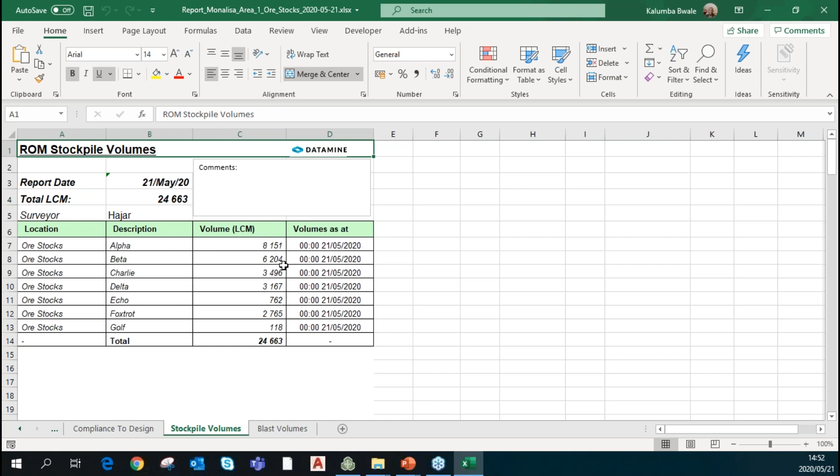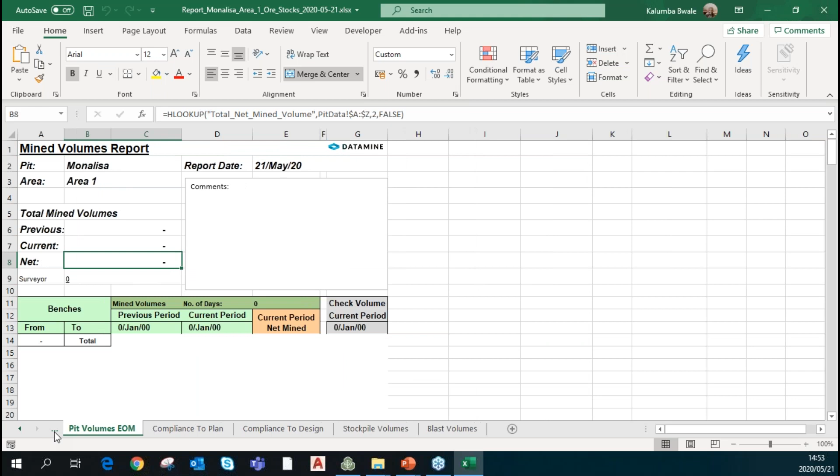So each of these volumes will be reported, and in the same report, you're going to have the same stockpile values that we calculated published. If you had done a compliance to design, you would have that report there. If you had done a compliance to plan, you would have that report there. If you had pit mined volumes for the month, you would have that report there. And at the end of the day, your first page is a summary that tells you your mined volumes, stockpile volumes, and blast volumes.

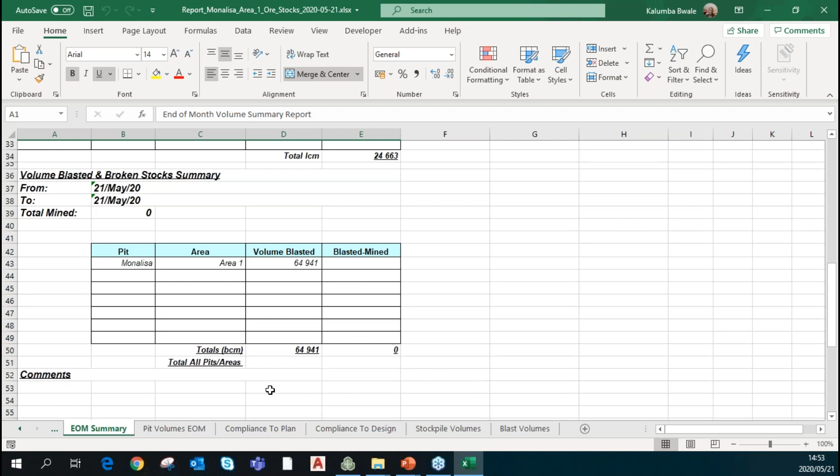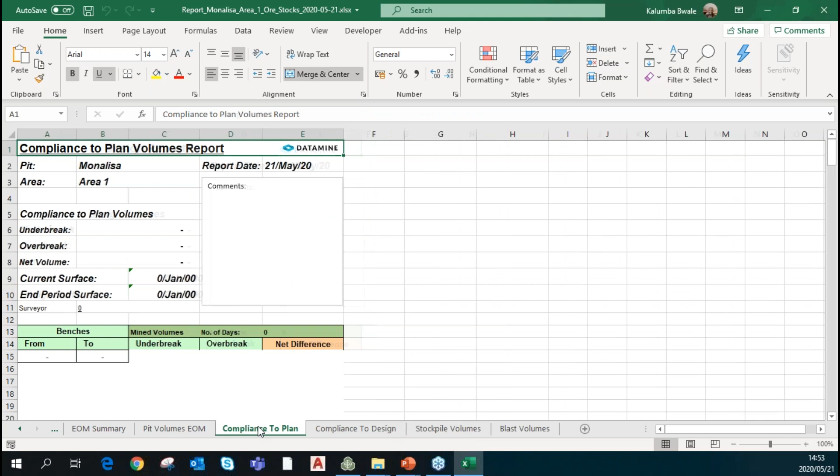Now, this is incorrect because we've got 3 successive blast volumes over the same area, so be careful not to do this. Make sure you've only got 1 blast volume for 1 specific spatial location in your pit, and you're going to have yourself a nice, consistent report. This was done specifically for the sake of the example that we needed to do. So in here, the correct volume would then be 24,842.

So at this point, we have 7 minutes towards the end of our demo.

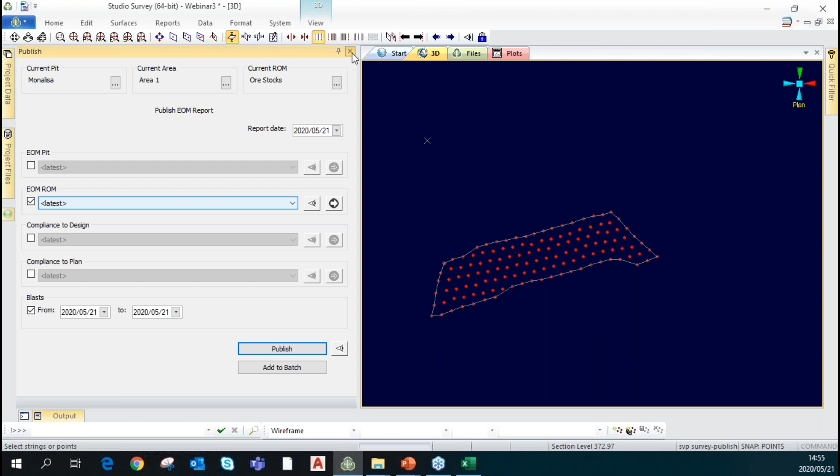Okay, excellent. Since we've got Studio open, thanks for that question, Aaron. On the Home tab, one thing we mentioned in the previous webinars is that this is arranged in the same manner that you do your work, from left to right, like reading English, French, and most other languages, except Chinese and Arabic, where you read from the other side.

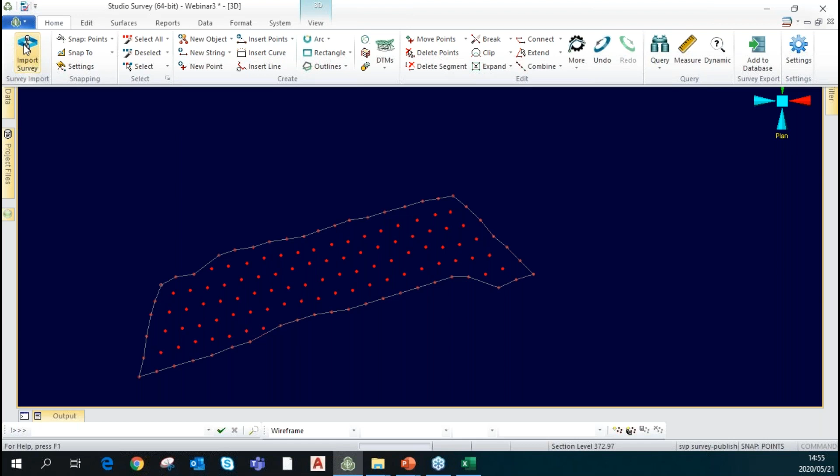So in this case, we go through the workflow in the same manner that we read. The first thing you're going to do is import your survey data using the survey import tool, opened over to the side. Let me just close that and click it open so you can see how quickly it works. Oh, it still wants to open on my other screen. That's fine, must be happy.

So what you've got, it doesn't want to listen, it's going to have a hiding after this. So you've got these options of equipment that have been made compatible with the software.

You simply plug your GPS or total station into your computer and you'll be able to process jobs that way. You'll be able to deal with a Leica dataset, a DBX, a GSI, or a field file. This would be an internal format that you've customized for yourself. It's going to handle a DBX file from a Leica GPS or from a Leica total station.

So you just select which one it is, as well as the respective GPS heights you've got, which might be orthometric or ellipsoidal, and then your various processing methods. Then you choose which surveyor did this job, and once you do that, you simply browse over to the location of your job and you're good to go.

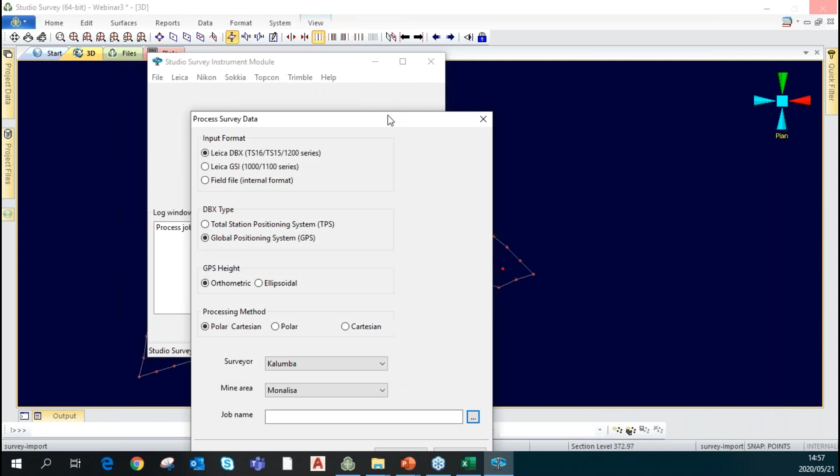You import that, and once you import your job, that importer creates a DM file that you will be able to view immediately in Studio Survey. Does that answer your question, Mr. Muniz?